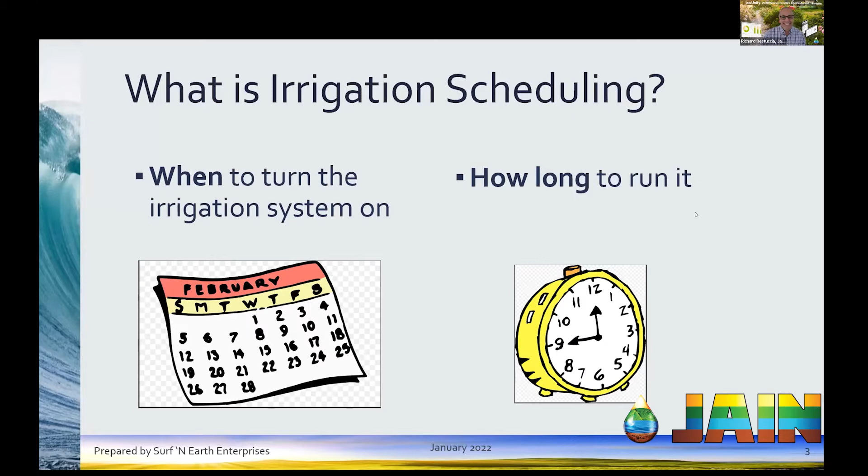Yeah, no worries. So, Richard, we were talking about this the other day, is why is it important? Well, we need to optimize the yield and quality, both from an economic standpoint. Our farmers want to be good business people and be profitable, but it's also because of resource stewardship. And as we just talked about the weather outlook, how much water are we going to have? We may be in a situation where we don't have all the water resources that we want and need.

And we also have water quality issues, water quality control board, and groundwater issues. We've been over-tapping our groundwater when we don't get the snowpack that we need. So we need to be good stewards of our resources for dozens and dozens of different reasons. And that's why irrigation scheduling, and as Tom will talk later, distribution uniformity, they're both very, very important to optimize both of these topics.

When I look at resource stewardship, I was just looking at the price of organic grains the other day, and how much more growers are getting for organic grains. And I started to think, will we ever see a day where people are advertising that they're using proper irrigation, drip irrigation, whatever, in the marketing of their products? Oh, I think so. Even during my brief 40-year career, I've seen that come to life. I mean, 40 years ago, organic was just a pipe dream, and now it's mainstream.

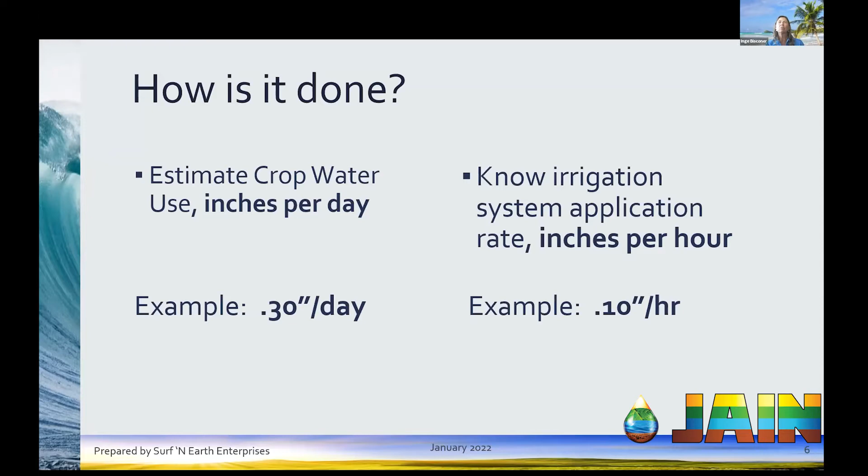Of course, depending on the distribution uniformity of that system, you have to derate that application rate, and Tom's going to talk about that. But as far as your crop water use, the common nomenclature is ET, evapotranspiration. Agencies such as University of California or the State Department of Water Resources have a ton of information on that. So you should be able to get both of these numbers fairly readily. And at the end of the day, the schedule is basically taking that 1/3 of an inch a day and dividing it by the 1/10 of an inch an hour to find out how many hours a day you need to irrigate.

Practically speaking, in this example, maybe somebody isn't going to turn the system on for 3 hours a day. Maybe they're going to turn it on for 9 hours every 3 days. And depending on whether the root zone can handle that and lots of other agronomic issues, that's perfectly okay. But that's basically how it's done. We have to find out how much the crop needs and how much we're putting on per hour with our system, and then come up with a theoretical hours per day.

So, as I said, there's tons of resources for crop water use: DWR, CIMIS, you can have your own weather station. The Almond Board's Irrigation Continuum is a really nice document that helps growers with these questions. Commercial services, there's more of those available every day, which is good. And then for the application rate, draw upon the irrigation community, such as the manufacturer or the dealer that sold the system to you. If not, a consultant or a commodity group like the Almond Board should be able to help you.

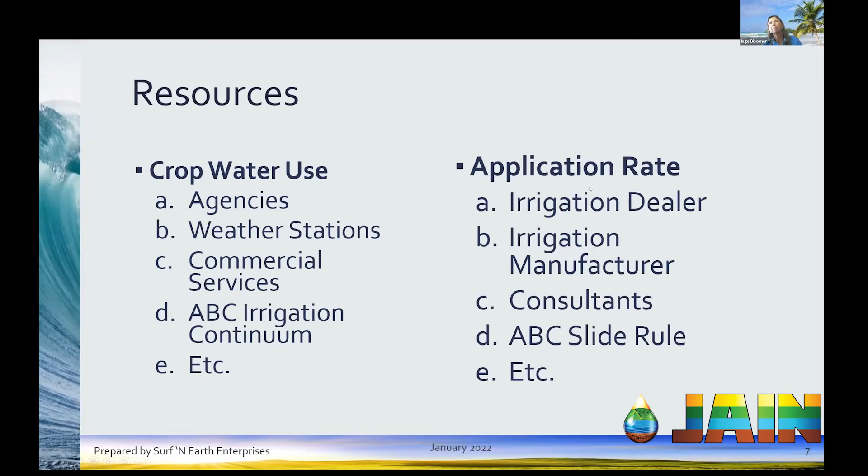Here's an example of the irrigation improvement continuum that is in a very nice manual the Almond Board produced years ago. I helped simplify this little schematic, but it talks about the irrigation system, water use, monitoring soil and plant, and the management, and then going through a 1.0, 2.0, 3.0 level of expertise. Very nice. Well described, Inge. What's that? Well described. Yeah. I really have to give credit to the Almond Board for doing this for their commodity group. I just really love it. It's 1.5 million acres, a big footprint in the state of California, a very important crop.

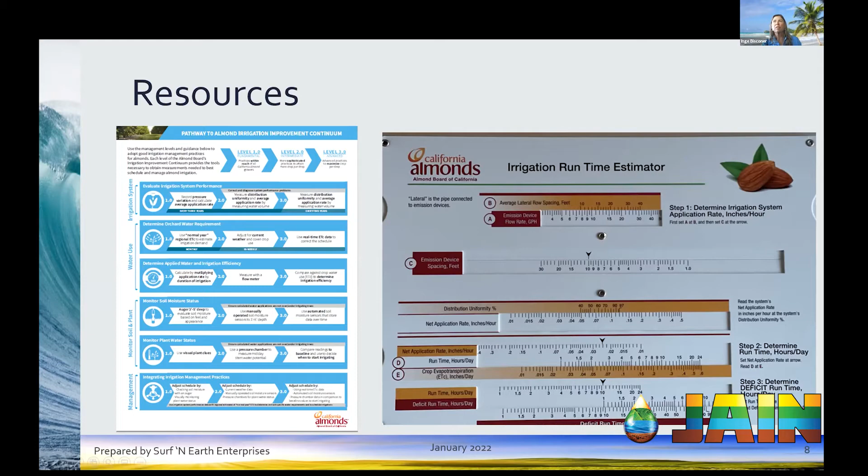And then the project that Tom and I worked on last year was this irrigation slide rule calculator. This is the scheduling side of it, and he's going to talk about the DU side of it. So some very nice tools available to help. And I'll just briefly talk about the irrigation runtime estimator, since we're on that topic right now.

The way this slide rule works is that you have three things that you need to know and maneuver on the actual slide rule. I don't think you can see this. Here. I think that fades into your background, but I love that you guys called it the slide rule, right? That was the predecessor to the Texas Instruments calculator we all owned right after slide rules. Yeah, well, so here it is in the flesh.

It's very handy. You can have it on your pickup dashboard or whatever, but basically you just need to know what your gallon per hour is of your emitters. In this case, it's a 0.6 gallon per hour emitter. And then you set A at B, which is the average lateral spacing. This is dual drip line on a 30-foot by 30-foot orchard, so the average lateral spacing is 15 feet. So we've lined up those two things. And then over here is your emitter spacing in the field, and that's 3 feet.

The third thing we look at over here is lining that up with your system DU to get your application rate. So it's really quite simple. Average lateral spacing 15 feet lined up with 0.6. Then we'll slide it over here with the 3-foot spacing, and voila, we read the application rate. In this case, it's 0.018 inches per hour at a DU of 85%. If you had a DU of 70%, we would derate the application rate and it would become 0.015 inches per hour. And that would be the figure you use for irrigation scheduling.

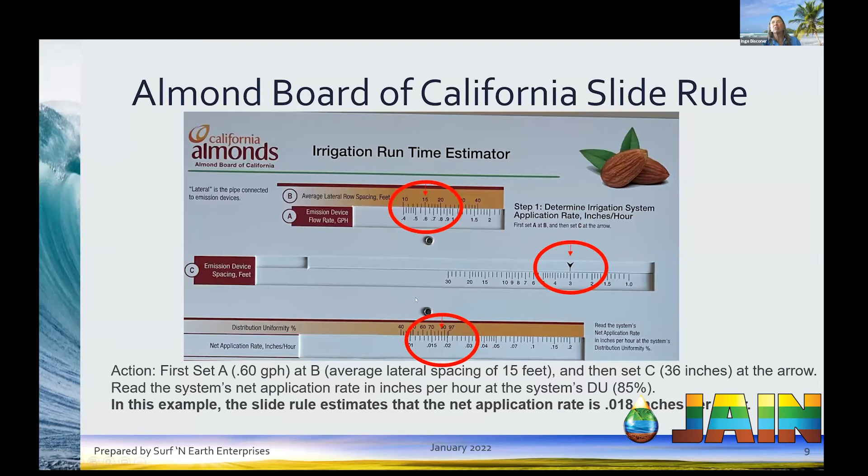So just other influences: as I mentioned, irrigation scheduling is not just a slam dunk. Hey, what's my crop water use and what's my application rate, 3 hours a day? We have soil issues, we have crop root zone depth. In the vegetable arena, wetting pattern is super important. Sometimes that dictates the schedules because we want to blacken the bed, especially at propagation and setting the transplant time. Other cultural activities: sometimes it's not convenient to irrigate if we're out there doing weed work, insect work or pruning work. And of course the time of year, whether it's January or the dead of summer in August, and whether the crop is young or mature, all of those will influence how much water we want to put on the crop.

But luckily, there's a ton of things that can help us, starting with the shovel. I would advocate that we never get rid of the shovel or the probe, and that we always have that in the back of the pickup to double check all this tech that we might have. We might have probes, we might have tensiometers. More and more, we're getting automation. We're irrigating from the sky and monitoring from the sky.

But at the end of the day, whatever we're calculating in theory, the most important thing we can put in the field, as they say, is the farmer's footsteps. Go out there and take a look, kick the dirt, dig a hole and make sure that you're getting the results that you want based on these calculations and or this technology. Trust and verify. Lots of trust and verify. Absolutely. I wouldn't presume that we're going to schedule that way, but we should go double check.

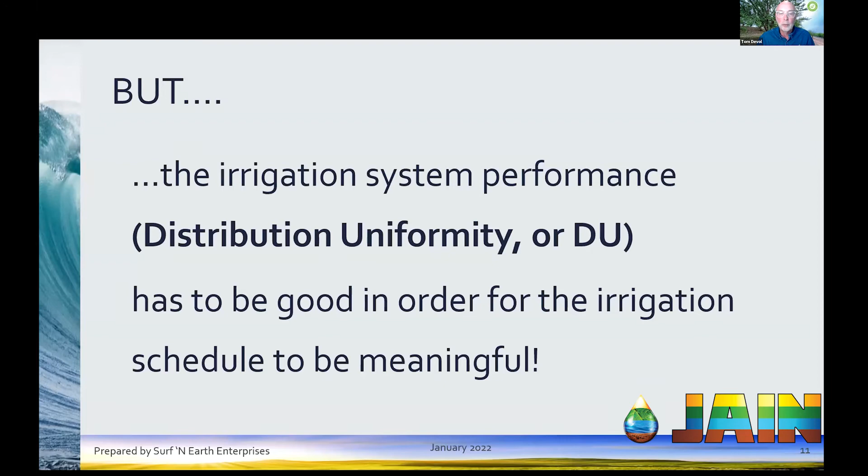All right, let me switch over here. Okay, I'm going to stop sharing.

Okay, has everybody got my screen up there now? Yeah, that looks great.

Great. So uniformity. Really, when we think of uniformity, as Inge says, we want to make sure that when we apply irrigation water, we're getting the same amount of water out of the drippers or sprinklers near the pump as we are at the far end of the orchard. And over time, those things change. Fortunately, we have really good design people in California. Engineering's normally not the problem. It's usually just what happens to things over time, right?

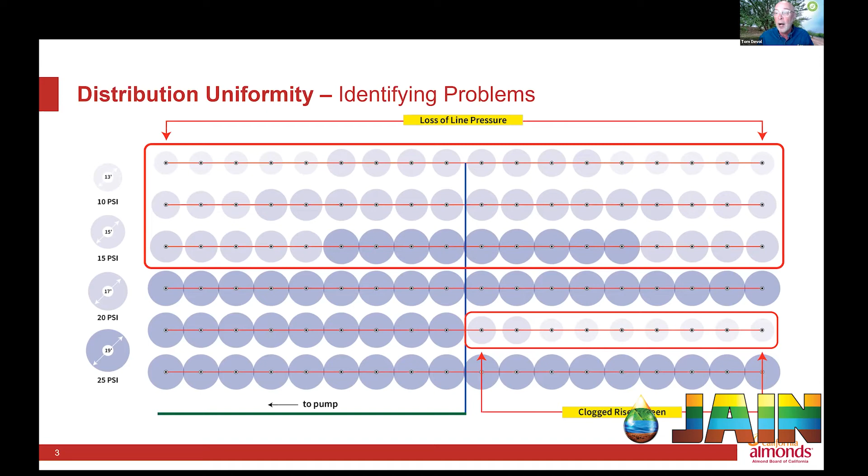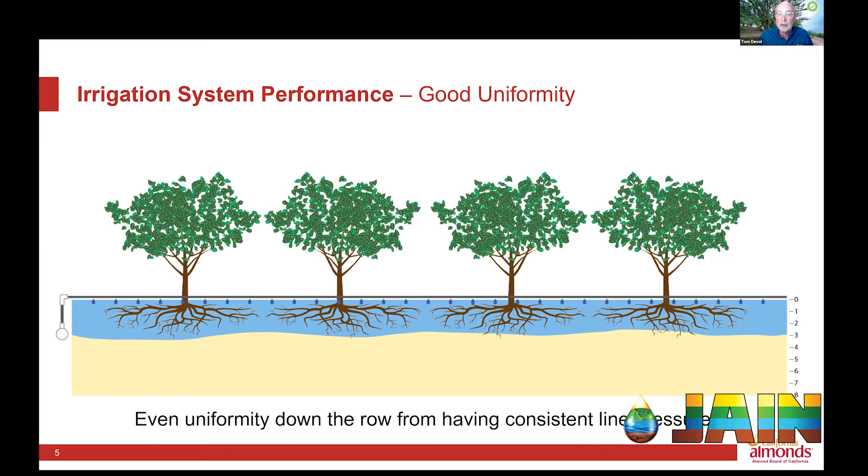So here's looking down a tree row. On the left of the screen, the water's coming up from the ground, going down the drip line to the end of the row. Our goal is to have that be nice and even. Soils impact this a little bit, but we're trying to get the depth of water applied to be pretty even. But when we have clogging or pressure challenges, the trees at the end of the row start to suffer. They're getting left out of water.

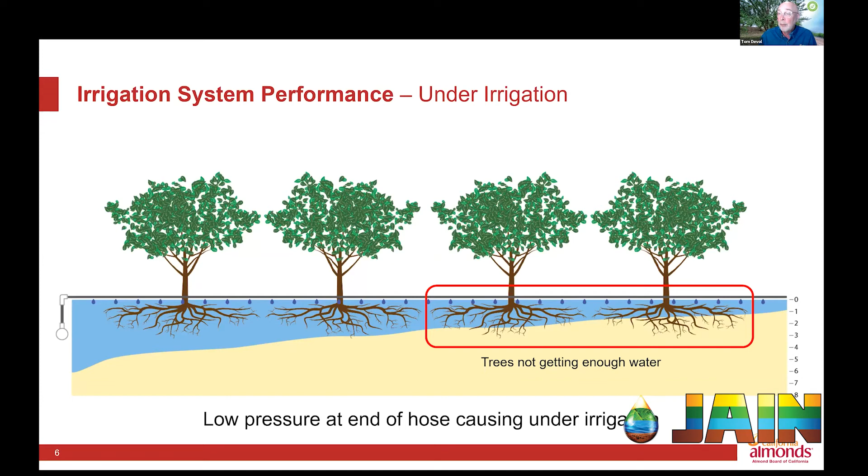And there's a way to overcome that: we over apply water. We have to run our irrigation longer than needed so we get adequate water out to the trees. If you have well percolating soils, that doesn't really impact tree health. You're just wasting water. And if you are injecting nutrients into your system, you're also wasting nutrients. Of any year we don't want to do that, when nutrient products that were $200 a ton last year are $800, $900, $1,000 a ton this year, we're talking real money.

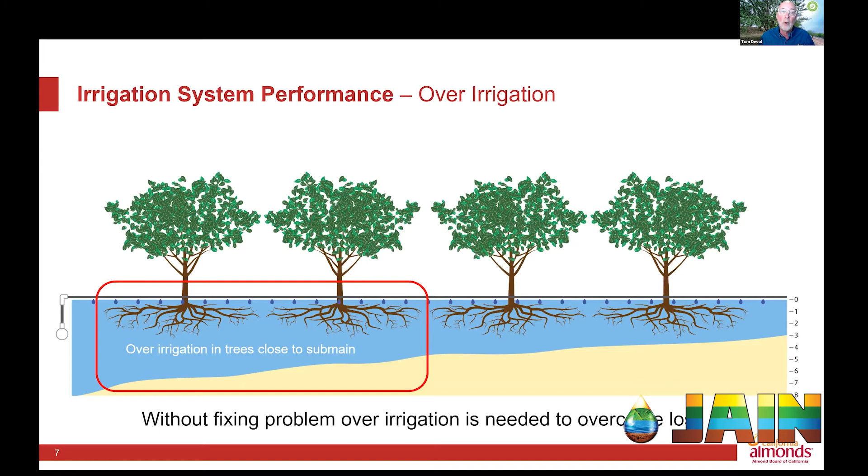We're losing money, and we're flushing nutrients through our root zone into groundwater. Neither one of those is a good thing. So this is why having a very uniform system is so important. When we look across systems tested, there's a number of groups that do system testing, we see where we lie as a state. This is data from Tehama County Resource Conservation District. They do system uniformity testing for us. In Kern County, the Northwest Kern RCD does testing. Tehama County gave me the results of a few hundred tests so we could see where we fall.

So does everybody do a distribution uniformity test on their farm or ranch? No, a very small percentage. And why not? It's hard for the grower to do. You really need somebody to come in to do it, and it takes time. That's why we provide some sponsorship, some funding, to some RCDs to help offset their costs. We wish we could do more. In the case of Tehama County, they provide that service free, but they can only do so many a year. And surprisingly, some growers don't see the importance of it. They don't understand. That's why we have this opportunity to share the impact. When we get to the financials, the financial impacts are kind of shocking. But this is available.

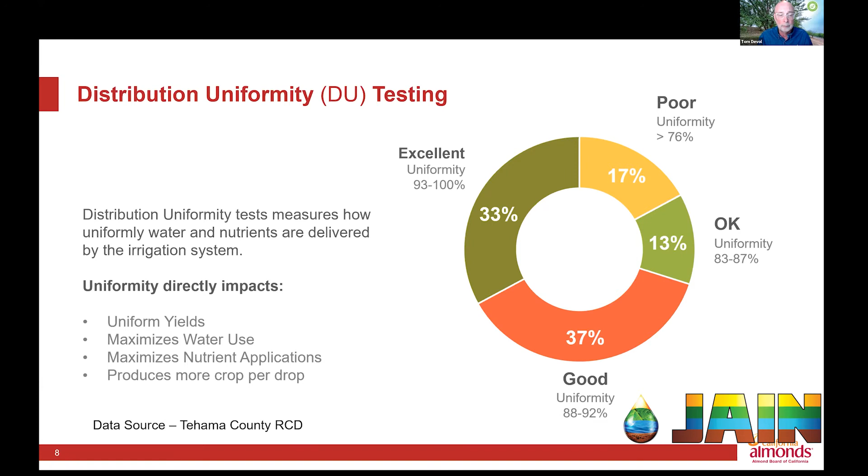Or the data tells us we do have problems with maintaining our systems. So I'm an advocate for making sure you go out and clean your system up every year, even if you're not getting a test, because the tests reflect the most common reason for poor uniformity is system maintenance. So if I could bring up the whole industry to do a standard annual maintenance plan, I'd probably bring up the uniformity without testing, right? And the biggest thing is clogged emitters, and that's a flushing challenge.

And the other thing, this statistic here, 27% flow meters, that means 27% of the systems had a flow meter? Yes. So that's one thing we ask when these tests are done, to give us some statistics on what standard field equipment is. So a third of growers have flow meters. That tells me a third of the growers actually are measuring how much water they're applying, and 2/3 of the growers don't really know.

Right, the reverse was what I was worried about. They're doing a back of the napkin calculation. And I love this kind of information because it really helps me understand what kind of outreach and education I need to do, right? But I would read this in the reverse. It tells me 2/3 aren't using flow meters, right? Good catch, Richard.

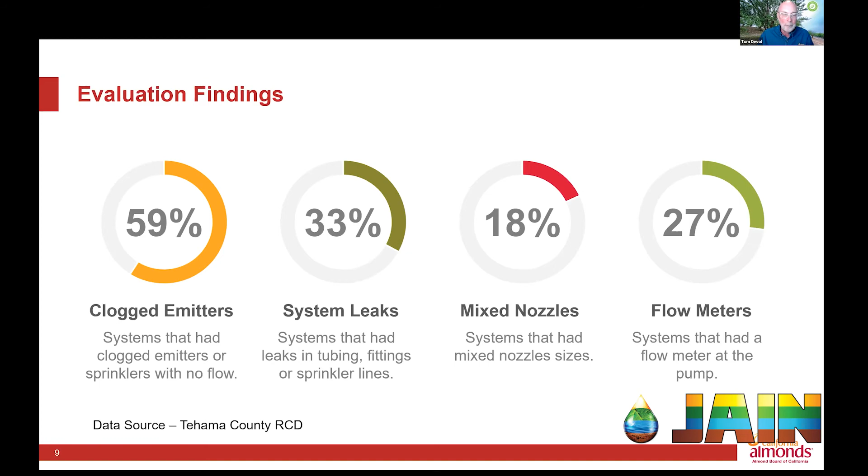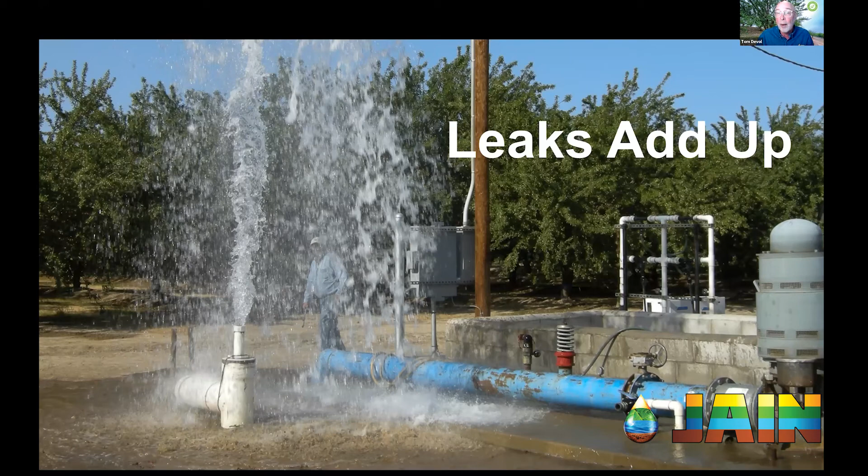So back to the maintenance. This is an example that leaks do add up, and this is part of the maintenance. Leaks do add up, and they measure up to a lot of water. And this is why over the last couple of years, we've really been pushing this topic hard. Just to give you an idea here, I had the RCDs measure leaks in the field while they were doing these distribution uniformity tests. I said, if you come by a leak, put a catch can under it.

So a missing sprinkler, microjet, almost a gallon a minute. So in one irrigation system, that one missing microjet, almost 47,000 gallons from one missing sprinkler. Yeah, wow. Yes, there was some benefit there. It recharged the aquifer, but it maybe killed a tree next to it, right?

And there is a drip emitter there as well, so they're getting twice the flow there. So that's 12,000 gallons in a season from that repair. Rather than splice in a new piece of tube, they just put a goof plug in and sprayed.

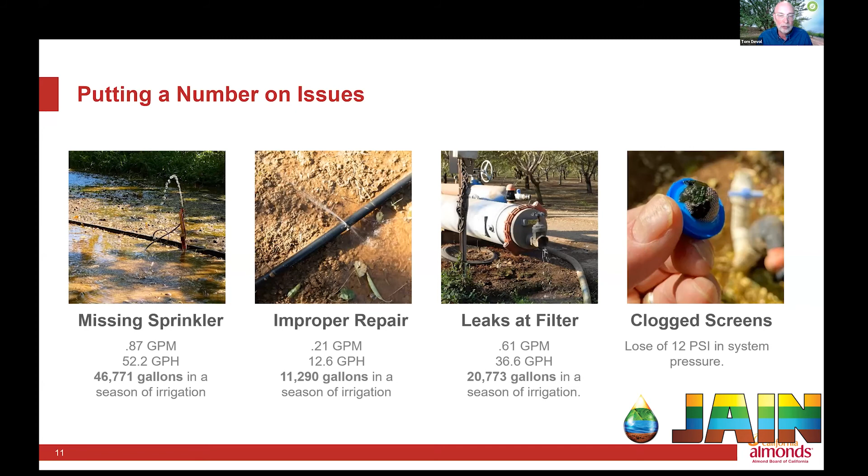And just to quantify this, we took one orchard that we did a test on, a 12-acre orchard. They were losing almost 25,000 gallons per week to leaks that we walked by and captured the flow on. They had more leaks than this. This is just what we captured.

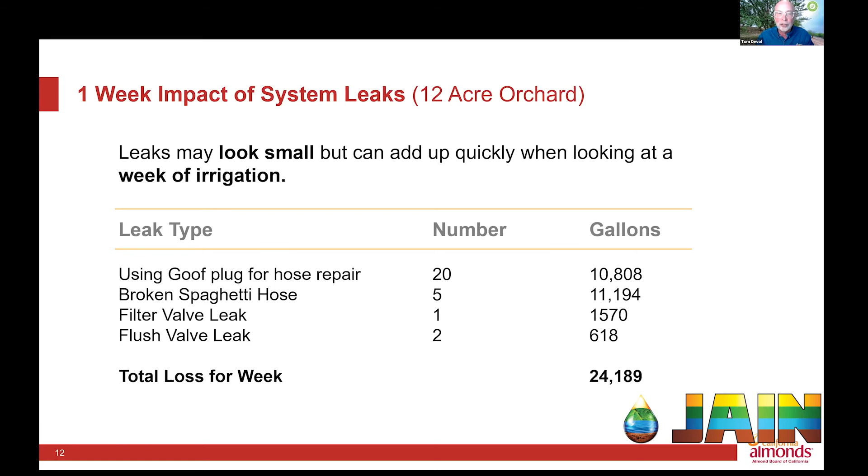And how much water is that? I always like to illustrate this in visuals so you can see it. Richard knows I like visuals. So if you think of a Kim tote in the field, that's 330 Kim totes of water. So just think 330 Kim totes stacked up over at the pump station. That's how much water they lost that week in irrigation.

I love that visual, Tom. Thank you. That's really good. That really makes an impact.

And man, depending on what you're paying for water. Sorry, I said 330, 73 Kim totes. Depending on what you're paying for water too, this can really add up. And the nutrients that you're injecting also are on top of that. So it's really important. And we mustn't forget, it's not just an economic issue.

This water and fertilizer is going places where it's unwanted. Yes. Sometimes it's very dangerous. It can pollute waterways and our groundwater. So it's bad on so many different levels. Yeah, all the way around it's bad.

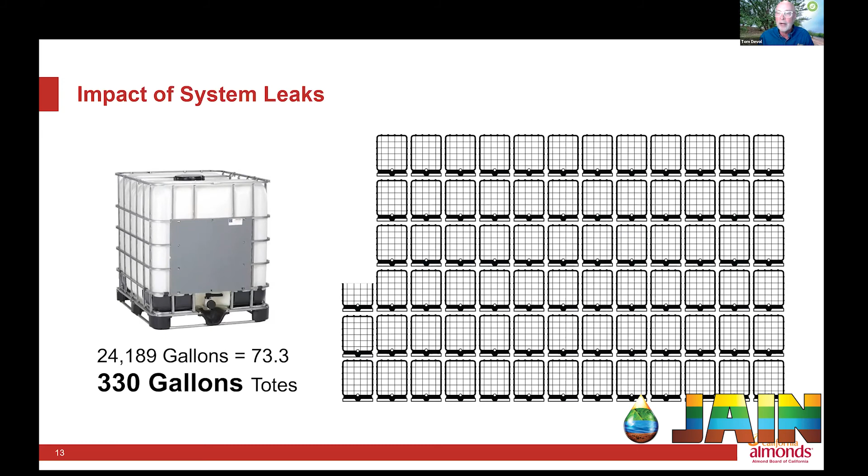So this really drove us to: how do we illustrate this, and how do we help provide a tool to a grower to help understand this? And it was great. The Almond Board partnered with Jain. We worked together to go old school, to do one of these old school slide rule calculators. As an irrigation designer, I had a drawer of these. I still have. I probably have a collection of 50 of them.

I love them. So we came up with this slide rule calculator, and I'm so thankful that the Almond Board afforded me as a staff person the resources to do this. And we're just rolling this out to growers now.

And what's it calculate? We have two sides. On the front side, it's calculations to really understand the financial side of poor uniformity. What's the impact between a 95% or 85%? What's the big deal? It's only 10%, right? So it really helps us understand that.

And then on the back side are some traditional irrigation calculations, because application rate, like we spoke earlier, is hard to understand. I still have growers that think, well, my application rate is 10.5 gallons an hour because that's what my dripper puts out. They don't understand that it's water applied across an acre of ground, right? And I understand why they're confused. We throw all these different units of measure at them, and we try to let them figure that out.

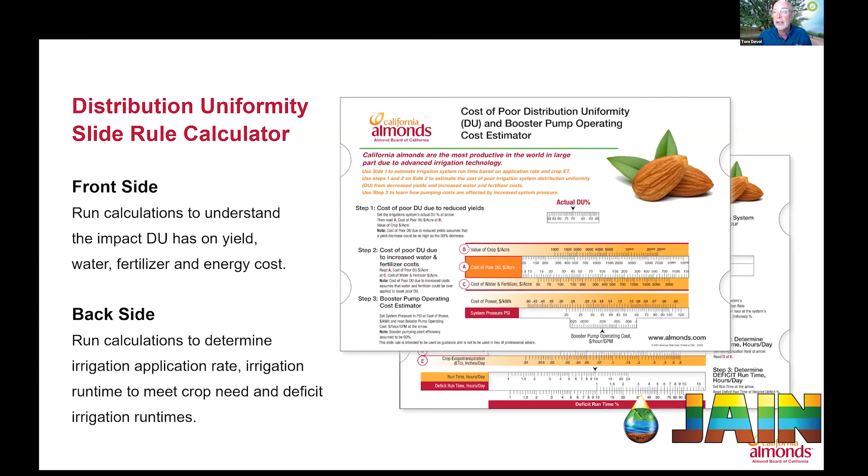So the backside of the calculator helps you calculate what your application rate is, and what a run time would be if you're trying to apply a certain amount of water. And it lets you understand things like, what if we want to deficit irrigate? In almonds, we like to deficit irrigate for hull split. So what if you want to deficit irrigate?

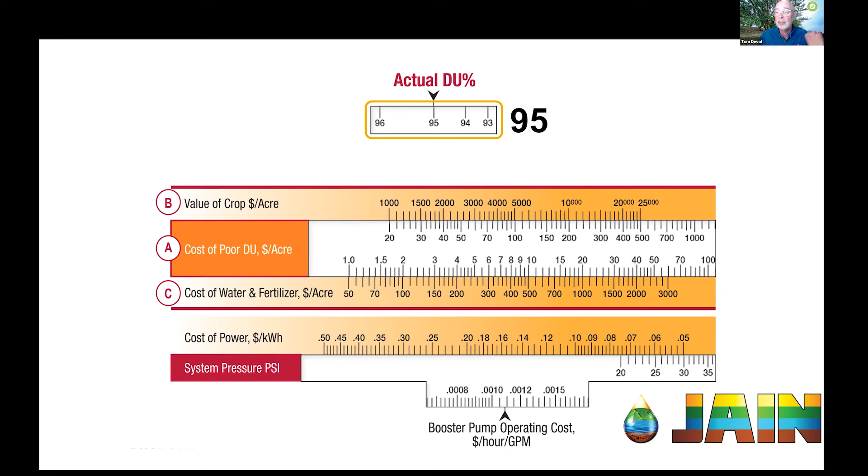So here, I'm going to run through a calculation just so you can see it. So I zoomed in a little bit here, and we're getting that number 95%. Of course, everybody's 95%. I got a brand new irrigation system, or we do a good cleaning process, so we're 95%. But the statistics tell me you're not. If I just run the statistics, you're not 95. You're likely more about 85, or you could be lower than 85.

So what's that mean? So we dialed this in with the slide rule, we slid it to 85. So I'm going to look at what the financial cost and yield is going to be. So we figure in almonds, statewide average about 2,750 pounds an acre for a yield, $2 a pound. It's a little lower than that. We're pushing to get that price up. And hopefully we get through COVID and shipping and all the multiple issues that have driven pricing down. But we hope to get price back up, but we're going to use $2 for easy math.

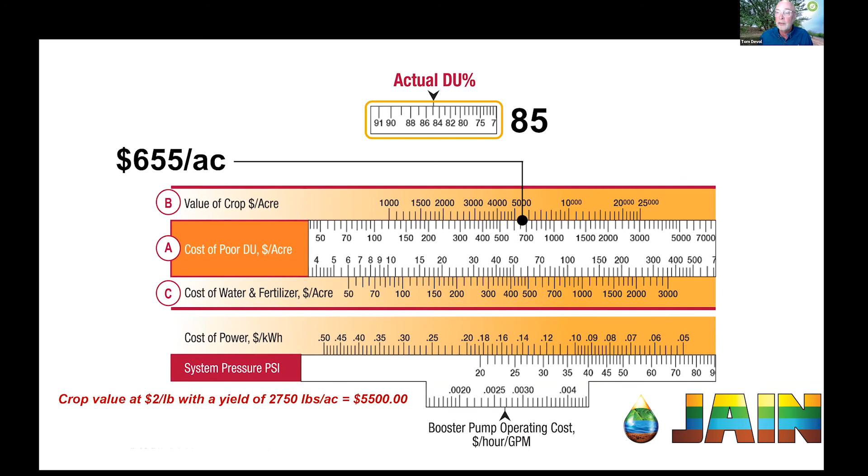So we got $5,500 an acre in revenue. So let's dial that in. So if we dial that in and we look at what the cost is per acre, it's about $655 an acre in lost income between a 95% and 85% uniformity. That's money I'd like to have. On a lean year, that can make a difference, right? Yeah, significant, especially when you start, this is per acre, right? Yeah, per acre. Now we're going to look at, well, what's the cost?

I'm just looking at water, but this second on point C there, you can put in a number for what the cost of water or water and fertilizer is, right? Fertilizer, I was scared to run the number at the price of fertilizers this year. When Jain and I designed this calculator, who knew that fertilizer costs could go 4 times what they were last year? I don't even know if our scale will work that far. You'd have to multiply, right?

But I'm going to say that we paid $300 an acre foot for water. Okay. So we're losing $36 an acre to over apply water to get enough water to the trees in the end row. That's essentially what we're doing. We're having to over apply water to get all the trees enough water. Okay. So what's that really measure up? So here, we're under $700 an acre, but nobody's irrigating just an acre. Nobody's growing only an acre of, in our case, almonds.

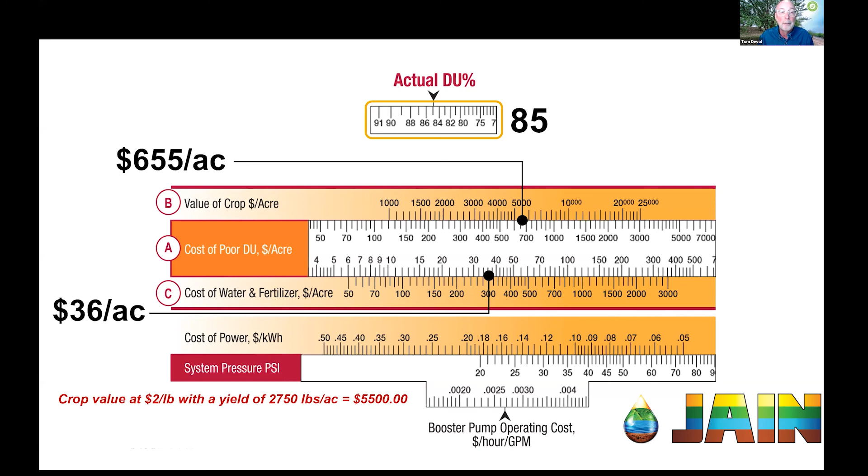Let's look at 100 acres, $70,000. That's a lot of money. And Tom, that's just comparing a DU of 95 versus 85. Yeah, if you were at 70. Which I think we know for a fact that there's a lot of 60s and 70s. I was just talking to somebody yesterday about DU tests coming in at 60. They were astonished that it was that poor.

And we could have gone on and added in the energy costs because you're going to have to pump longer, right? So you got energy costs. And this year, if I'd included the fertilizer cost, it would have been daunting, right? Yeah. I only included $300 an acre foot. That could have been $1,100 for water and fertilizer per acre, right? So it's really, really important to look at this. And this is why we did this slide rule. You know, it's not perfect. It's really to illustrate the cost.

And some people will go back and forth on what the yield difference is. We figure, what do we say, Inge, per percent drop, a percent of yield loss, right? Yeah, the industry's used that number for a long time. That's kind of been an industry standard for a while, that for every percent loss in DU, you're probably a corresponding crop loss of about 1% as well. Yeah, and I think I looked at some research in the 0.7 to 1% range.